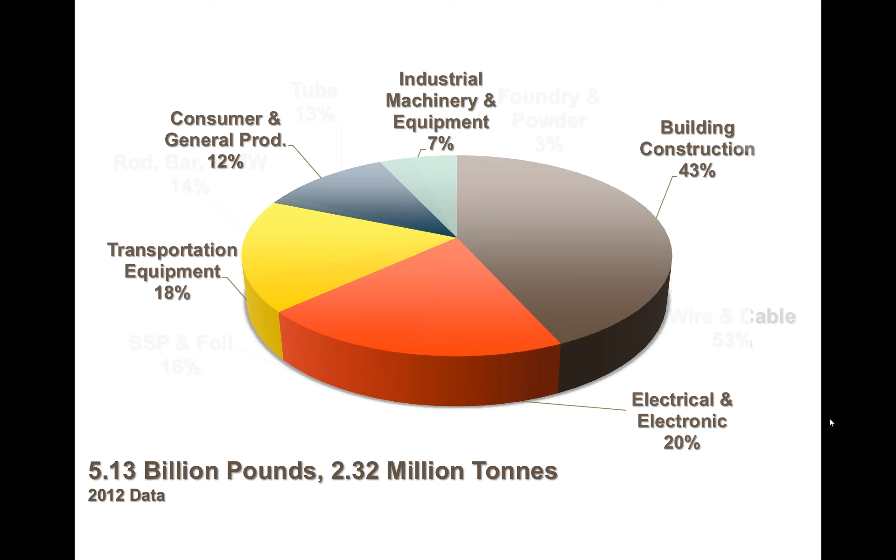But if you look at it a different way, as to product—what type of copper or copper alloy material is being used—53% of the usage is in wire and cable, so a preponderance is electrical in various forms. Sheet, strip, plate, and foil—flat products—16%, so that's a significant portion. Rod, bar, and mechanical wire, 14%.

Tube, 13%. So in your service centers, when you stock all these products, you can relate back to this earlier slide—it goes into a lot of these different areas. And lastly, foundry and powder products are about 3% of the overall market usage.

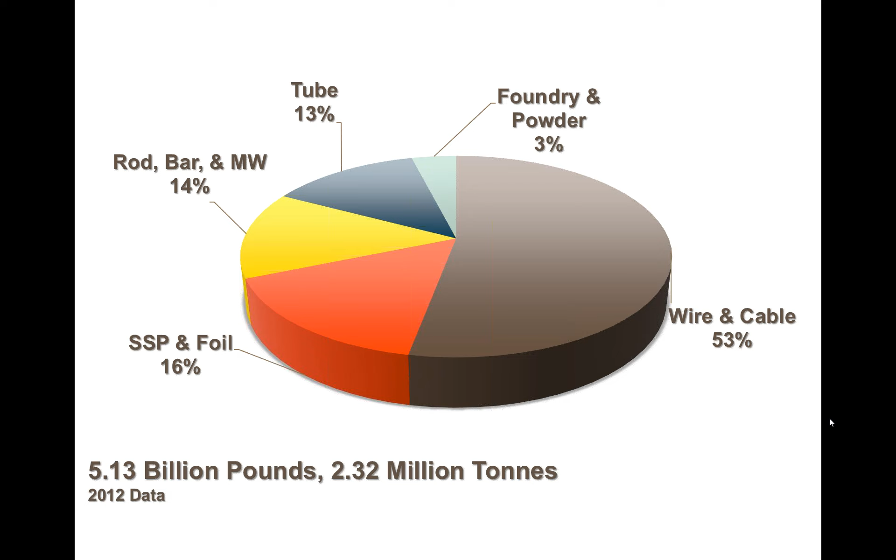Okay, we did talk last time about getting copper alloys into a certain form, and that was mill processing. I emphasized flat rolled products—so these are fabrication methods in a general sense.

You can roll it into shape, and we'll look at a couple photos of that. You can draw products into shape, into primarily wire, but other things. Extrusion, casting, and there's a couple varieties of castings. Forging processes, and stamping processes. There's others that have small segments - we won't talk about those.

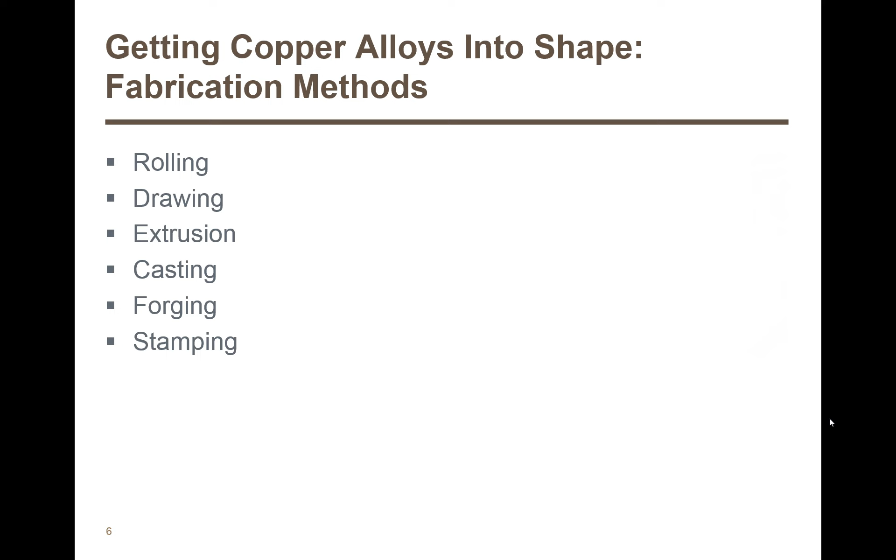Now, in the mill processing discussion last fall, we talked about rolling, and in a regular flat rolled products mill, most of the time you go through a hot rolling stage, shown on the left, and then a cold rolling segment, shown on the right. That can be broken down into a wide variety of cold rolling stations. You process it at various widths in various size coils until you get down to the exact size or thickness you want, and then you slit it, finish it, and pack it, ship it out the door.

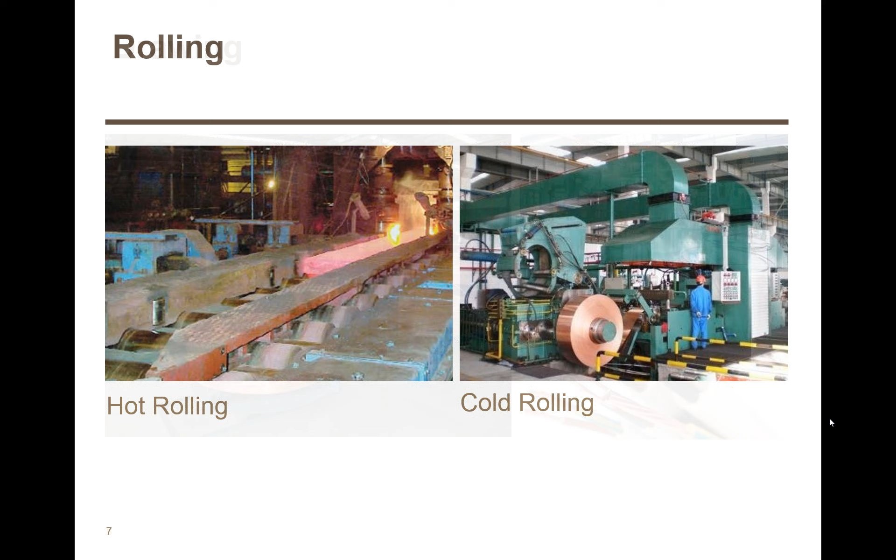But if anybody, and most of us have, worked with electrical wire or electrical cable at various times, you know that inside a cable, no matter whether it's a coaxial cable, a multi-strand cable, or just a home wiring system, there are multiple wires there, and some of them are very thin. So this is where your wire comes from. You can also draw down tubing. I don't have that illustration, but tubing can be drawn down in that sense as well.

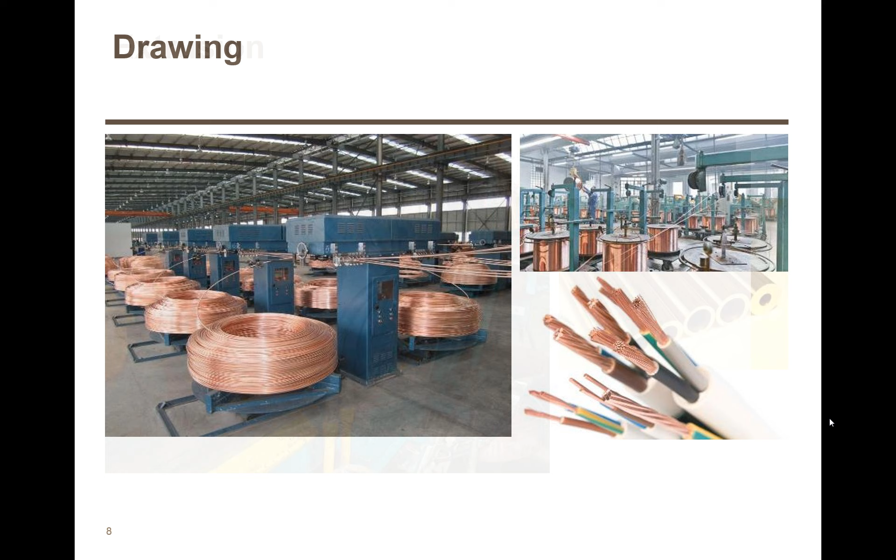Essentially, extrusion is a process whereby you take a round billet of reasonably large diameter, warm that, and push it through a machine whereby it contains a die, and that die shapes what comes out the other end. I always liken it to squeezing toothpaste out of a tube - most of us have children or have had little ones in the house, you buy some kids' toothpastes, they have shapes on the end. You can extrude the toothpaste into a shape like a star. It's exactly what you're doing in extrusion of the product here, although the toothpaste is cool and this happens to be warm.

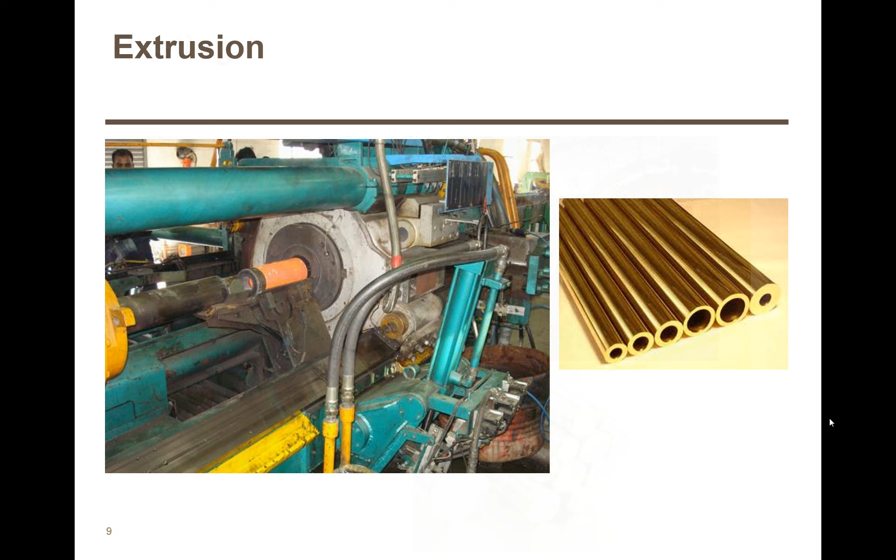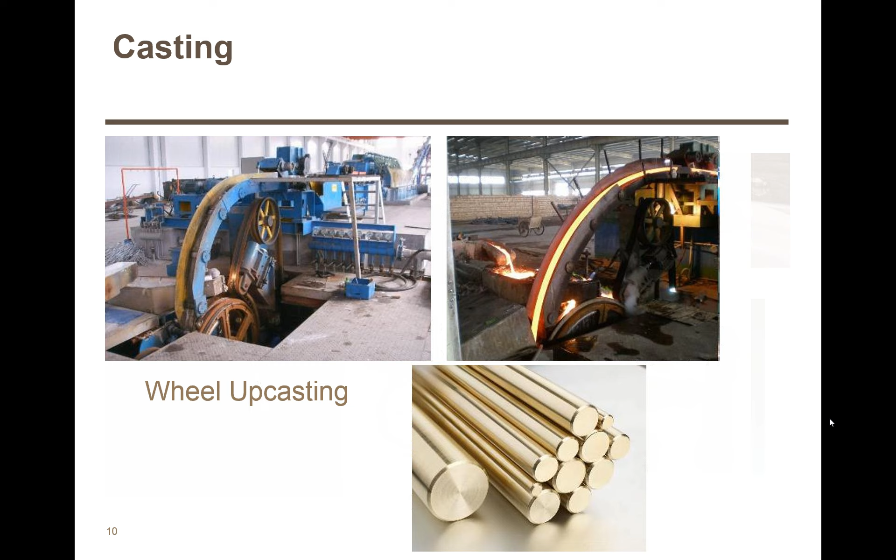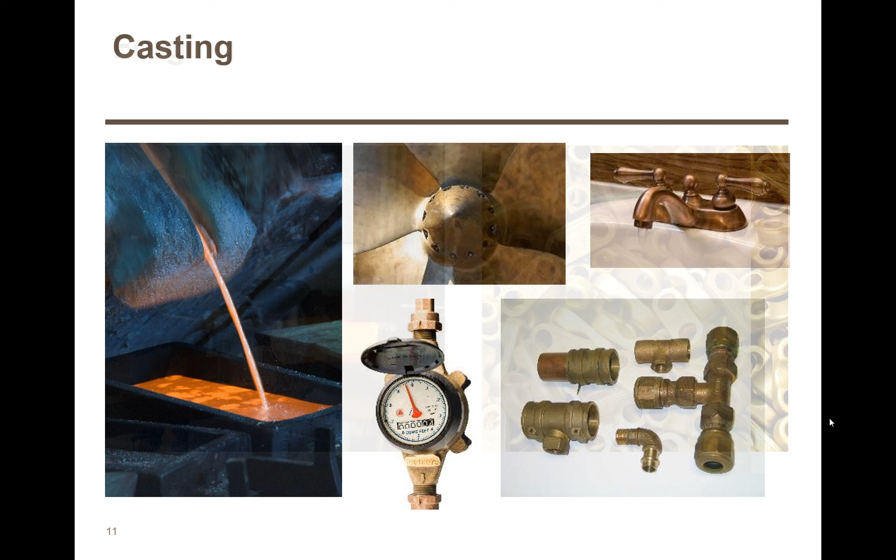And here are some parts on the right that are produced in a semi-automated fashion in a forging process. These happen to be links that are going to end up forming a chain.

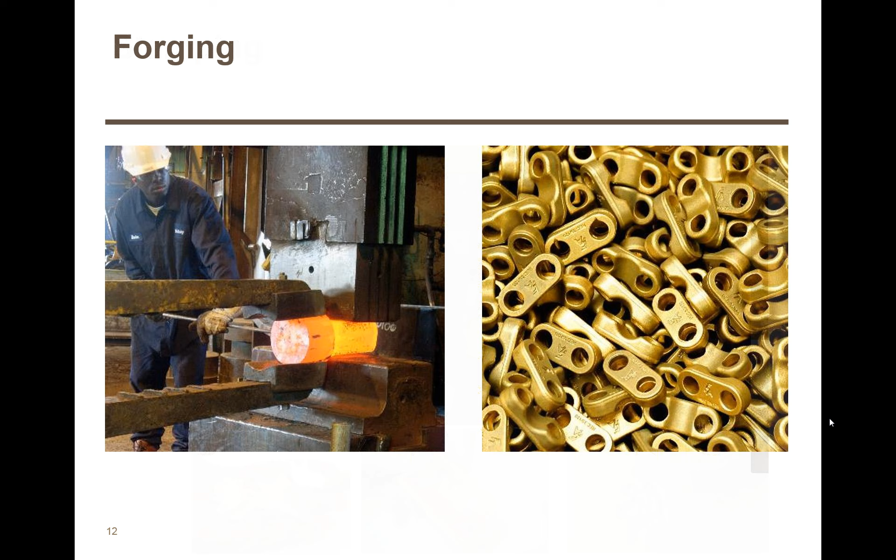Stamping can also be, in the upper right, although it's usually called coining when you apply it to coinage. And here you have U.S. coinage. And in the lower right, stamping can also be where you just place an imprint on something.

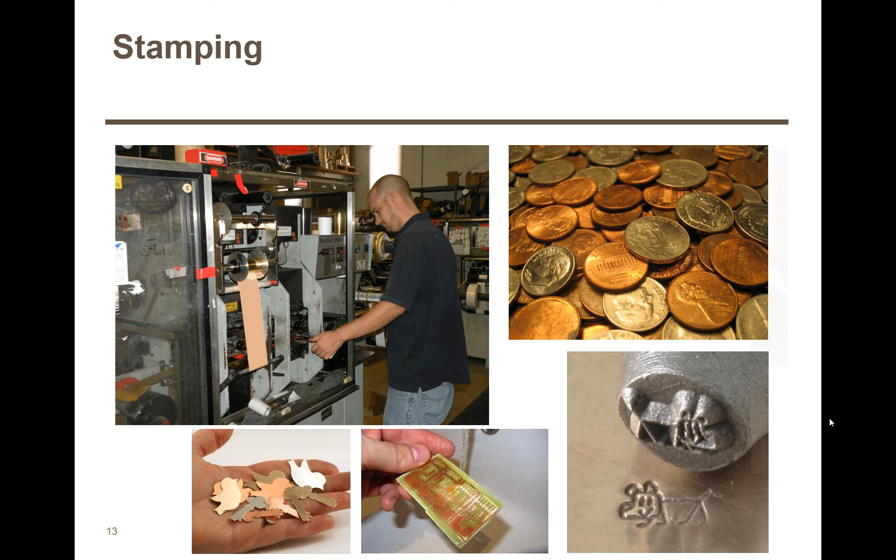It's easily alloyed, has good corrosion resistance. We'll talk about that in a little while. It's readily available. There's no loss or no lack of copper in the world. And it's highly recyclable. You can melt down what you use today and make something for tomorrow. And it's antimicrobial, and we'll reference that as well.

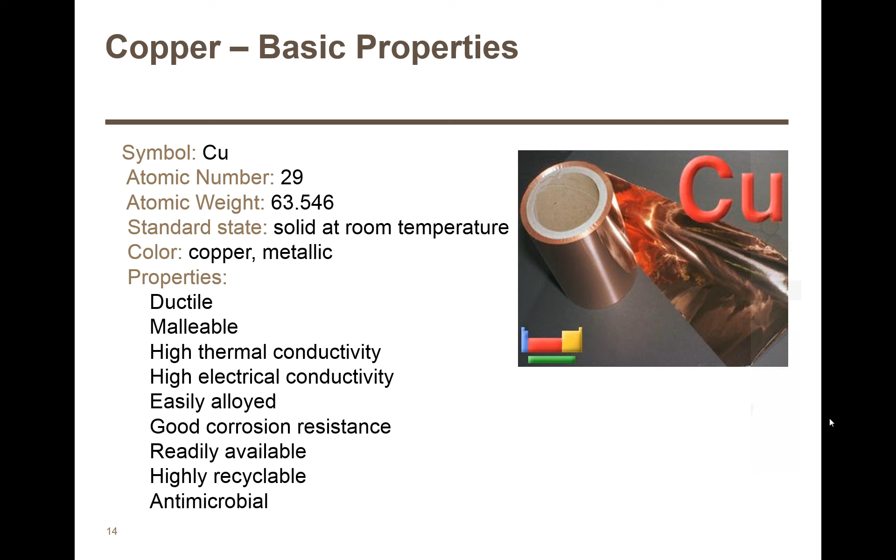Something I could point out is that copper for wiring generally has to be made out of new copper, just mined and refined copper. Because if you have too many defects in and/or impurities in the copper, it doesn't transfer electricity as well. So by and large, wire and cable is made from pure, brand new copper. That's a very significant point.

But this can be recycled when it's recycled into almost any other product.

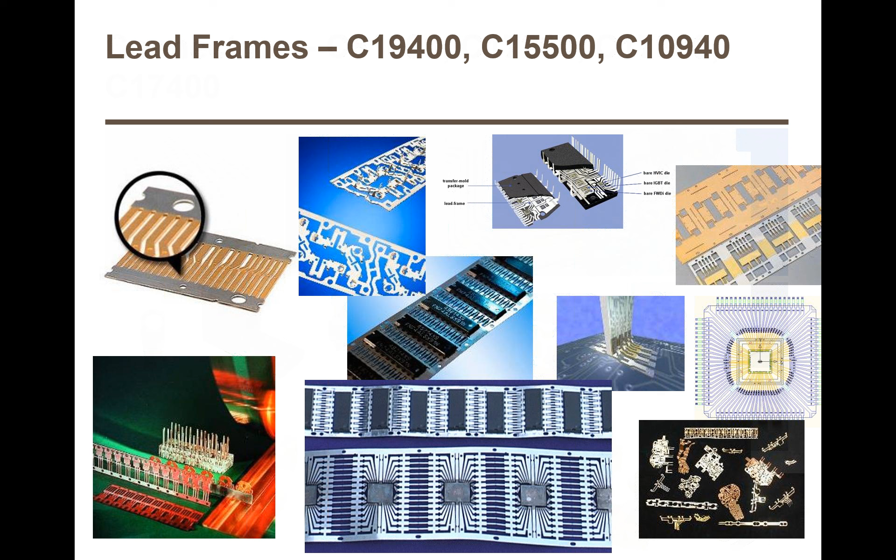You have to have a retention of strength. If you have to insert the connector multiple times or disconnect and reconnect something, you can't have loss of strength. Another reason you have to have strength over time: many times one connector is stuck inside another connector and they're sprung together. If that connection loses strength, it can lose contact and your circuitry will be less effective.

Spring characteristics are very important. So these alloys, C51000 is a phosphor bronze, and the 172, 173, 174 alloys are beryllium coppers. They generally do not lose strength over the period of time your device would be in use, and sometimes this is multiple years, up to 10 or more.

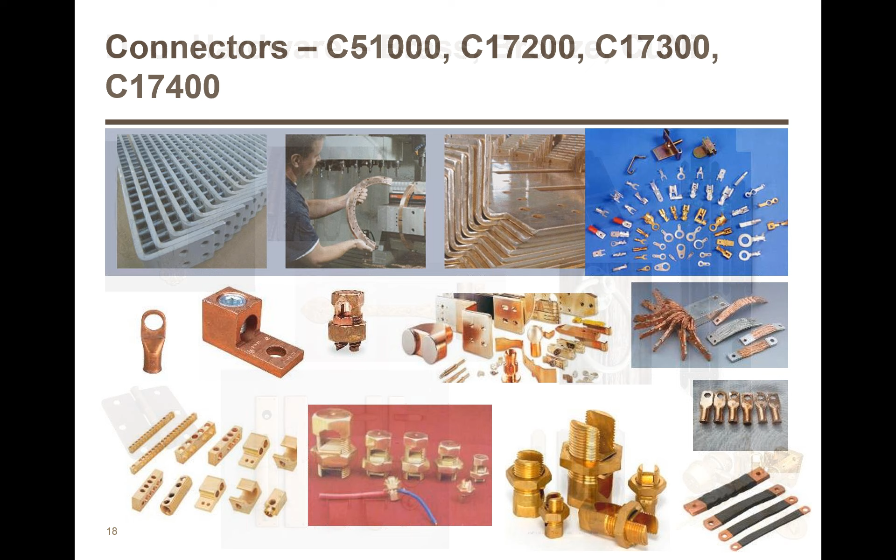I know on my house I have brass entry sets, pass sets, and locks - they're very good for years of use. In fact, when I moved in, the house wasn't new, it's 60-some years old, and it had brass fittings and fixtures, which we've replaced in some instances, but some are still there. So they are highly durable.

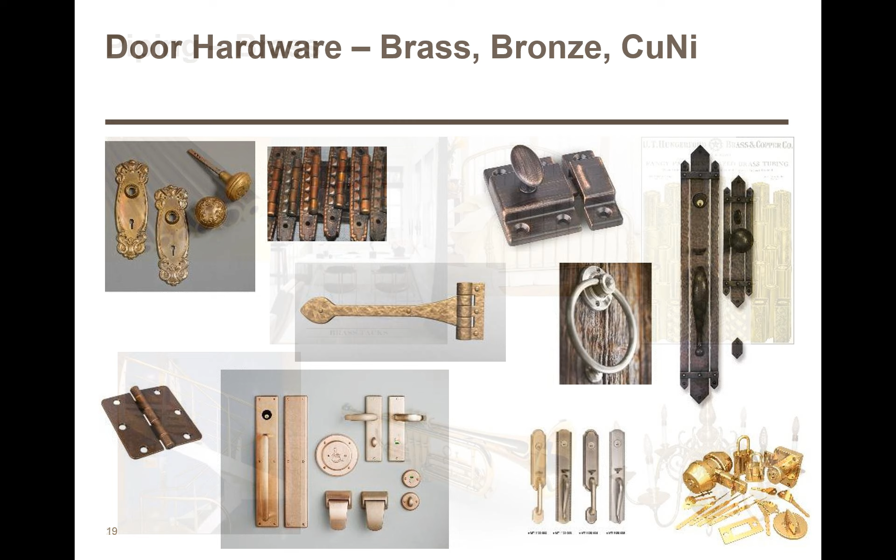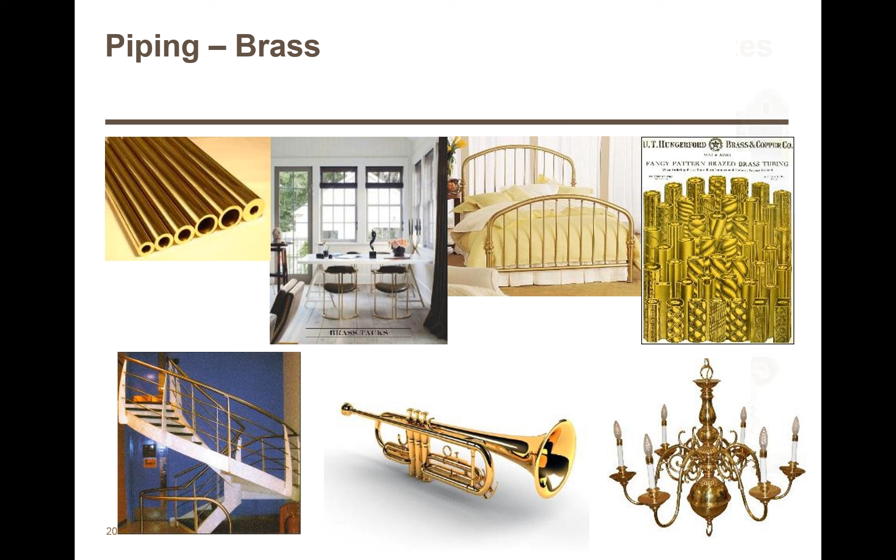So these have been made for decades, millennia actually. Finish is important, forming quality when you have these intricate details, and casting characteristics of the alloy. You have to be able to produce a Class A finish in the casting with these materials, and brass and bronze has done that over the ages.

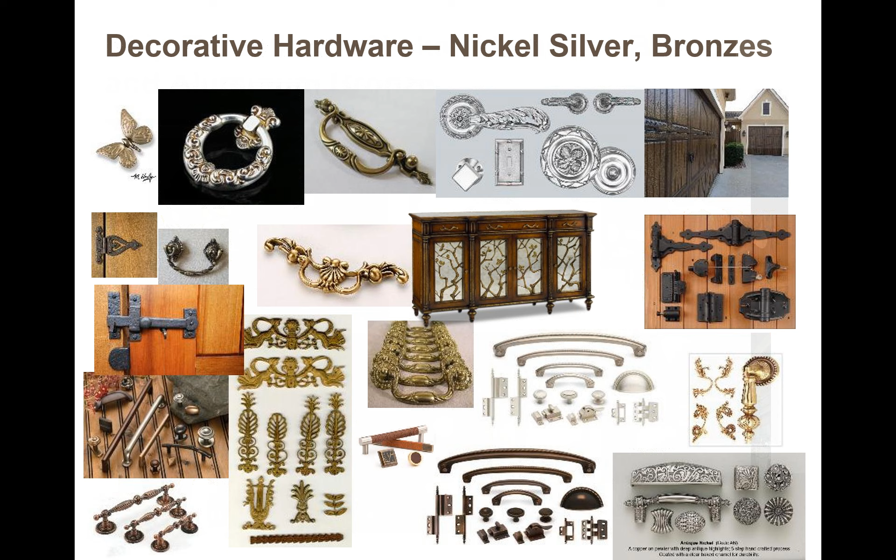There are ships' propellers, obviously, in civilian use that are made out of the same materials, but fail-safe situations require that the military have very good propellers as well as other equipment, and we'll get to some of that in a minute.

These are all cast, so they must be strong. They must be corrosion resistant. They must be machinable, because once you get them out of the casting, you have to finish machining them. And they must be cavitation resistant. There's a corrosion problem called cavitation that happens on many propellers that causes them to fail. That's one of the main reasons why these bronzes are used for these propeller operations or applications.

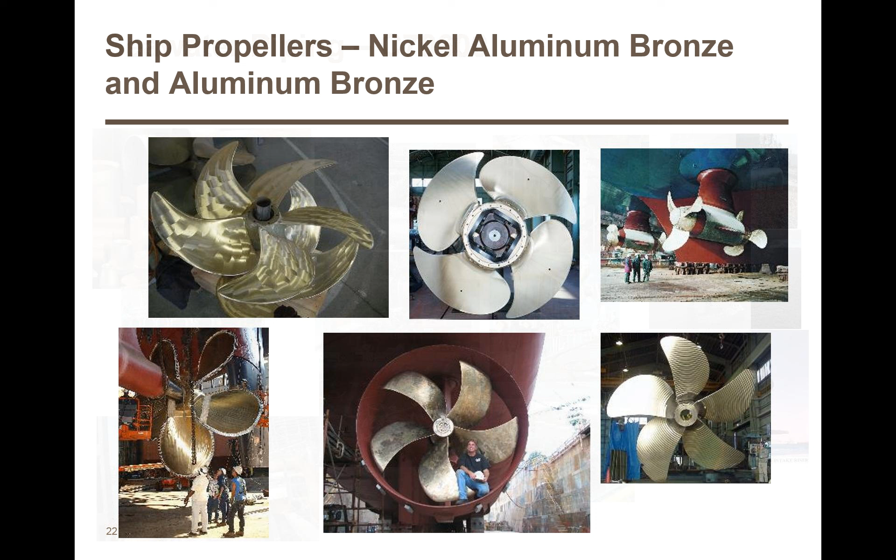Corrosion resistance, weldability, flowing seawater resistance is significant here, where you don't want corrosion through at a bend or something, and copper nickel is the best material for this.

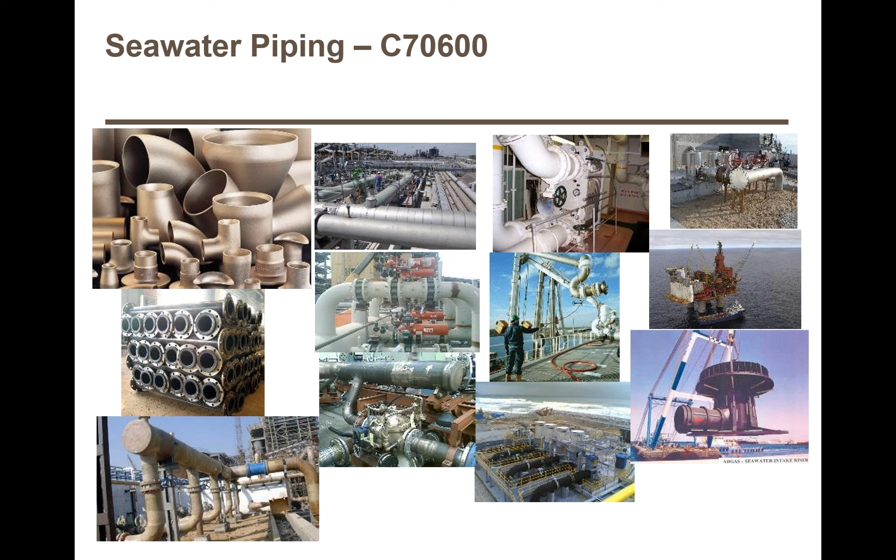Auxiliary to this are heat exchangers for seawater applications. Most of the time those pieces of piping or tubing are connected to heat exchangers, not only on a ship or a platform, but in a desalination plant or something like that. Again, you cannot have these fail because of corrosion, seawater corrosion, and flowing seawater corrosion. Very important.

The next application, well, let me back up. There's two alloys used in these heat exchangers. One is 90-10 copper nickel. The other is 70-30 copper nickel. 70-30 is the preferred alloy for those.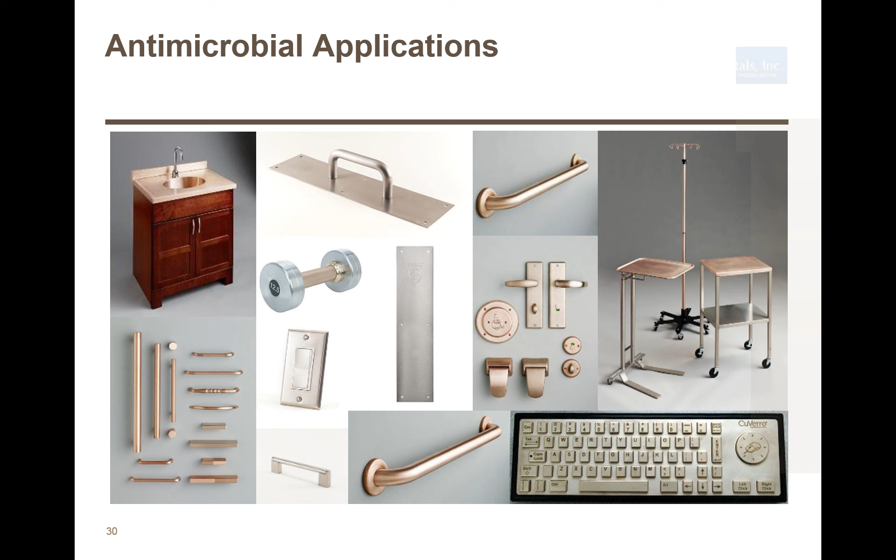And I believe that's my last slide of applications. Now, I've tried to impart the idea that the properties, the inherent properties, or the physical and chemical and other properties that are inherent in copper and copper alloys have a direct effect on how we use these things, and why we use them in certain ways. I hope that is helpful. I think it is a third part to what I've tried to do in the first two webinars, and I believe I'll take your questions if you have them.